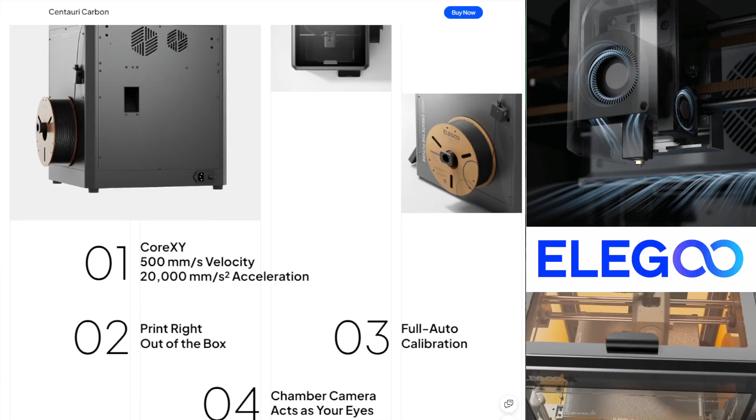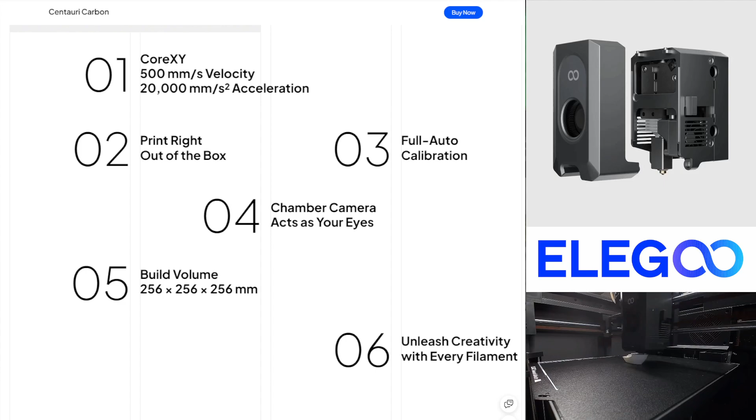Full auto calibration, has a camera built into it, so it can record its own videos and you can also monitor it, I believe. The build volume is the same as the Bambu at 256 by 256 by 256, so not too small, but not too large, but it'll do.

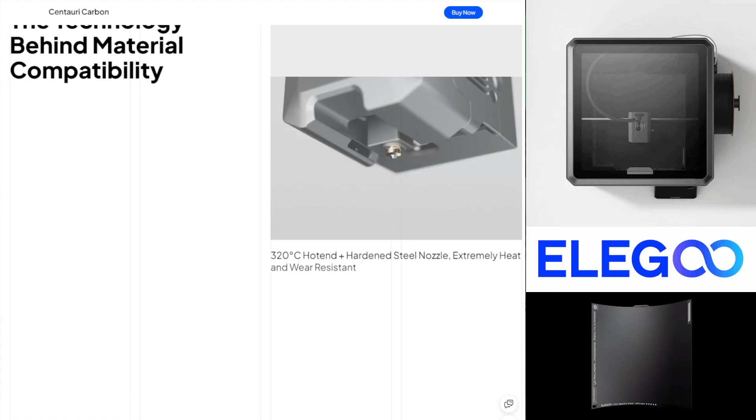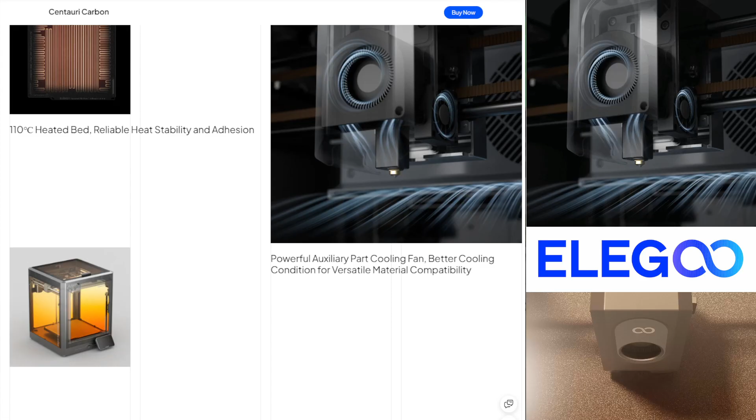You can see it's a little building there. Should be able to work with pretty much every material, 320 degree hot end. Comes with a hardened steel nozzle, which will work well for the materials. 110 degree heated bed, looks like nice even heating.

Cooling fans, the enclosed case, up to 60 degrees Celsius in the chamber, so you can print some of those more difficult materials like ASA, ABS that require a little more temperature control. Says printing right out of the box. Auto leveling, auto Z offset, auto vibration calibration, and auto pressure advance calibration.

We'll get into all of that with the camera, real-time monitoring, and recording videos with time-lapse. This is interesting to me, this even more carefree. So it has auto filament unloading, which most do, but this one looks like it cuts it because it runs through a feeding tube versus like a direct drive. I'm curious to see how well that works for things like TPU, which can have a little trouble feeding through. Has a fan self-check, self-automatic belt tensioner, the classic filament detector, built for speed.

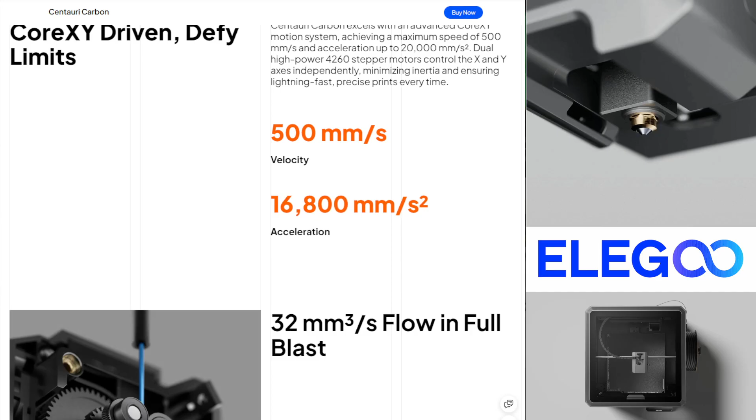I'm really excited to check this thing out, and I was lucky enough to get one of the first batches they had in the US. Other people are going to be waiting until like March, May, even June to get theirs. So yeah, that's the printer in a nutshell.

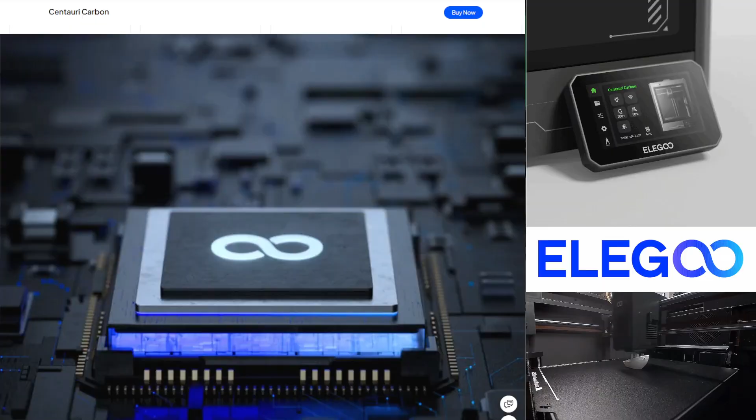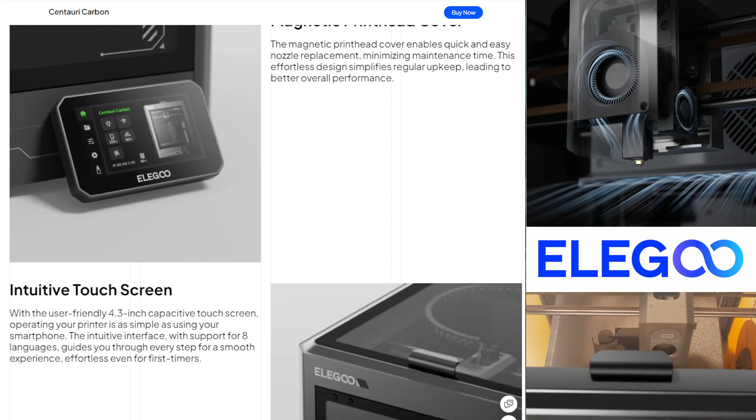Flexible plate, ultra user friendly, OTA upgrades, 8 gig ROM, dual band Wi-Fi, LAN enabled, filament on the side. It gives you a file, I think, for a filament waste bin, which is important if they do have the AMS. Little nozzle bed wiper built in, magnetic little front cover, so hopefully it's easier access. A touch screen, 4.3 inch touch screen, transparent glass doors, filters.

I mean, it looks like a high quality printer. Oh, and the price—it's freaking $299 for this thing. That's ridiculous for what this printer is.

So let's go ahead and get into the unboxing of it, because that's what I'm excited about. Right here, the Centauri Carbon. Woo! Big old box. Let's open it up and see what we got.

Just in case, they recommend keeping the box and packaging for 30 days in case you need to return or exchange. How nice. Alright, so make sure we can see everything. Foam on top. Whoa, that little pretty one. Oh, that's glass—must be the glass from the top. So that's that right here. Foam.

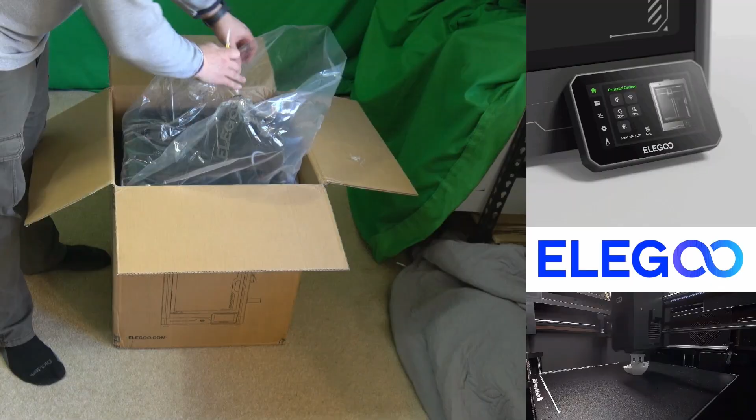So, as you may or may not know with my channel, I've been running the 3D Print Shop since 2021. Mostly making Quest and VR accessories, but also taking custom orders, printed game board pieces, and all different things. So I'm excited to use this for that particularly, and whatever else I have dreamed up.

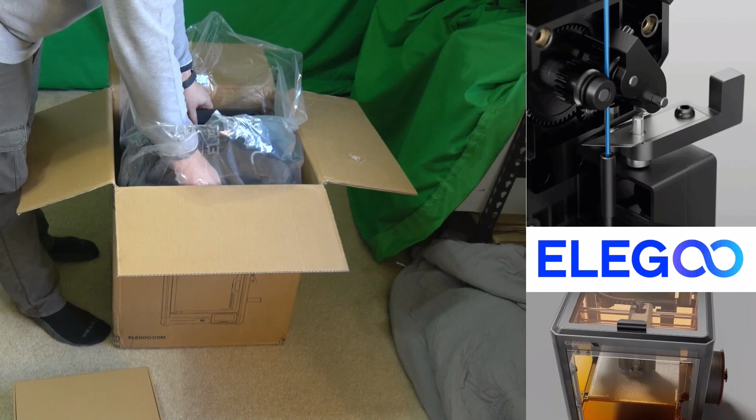Another piece of foam here, another foam in the box there. Oh, look at you. That down. Ready to come out again. Another little foam. Alright, I think we gotta get it out.

More foam. Well, we definitely have packaged this thing well. More foam. I can't guess. More foam. One more. There we go.

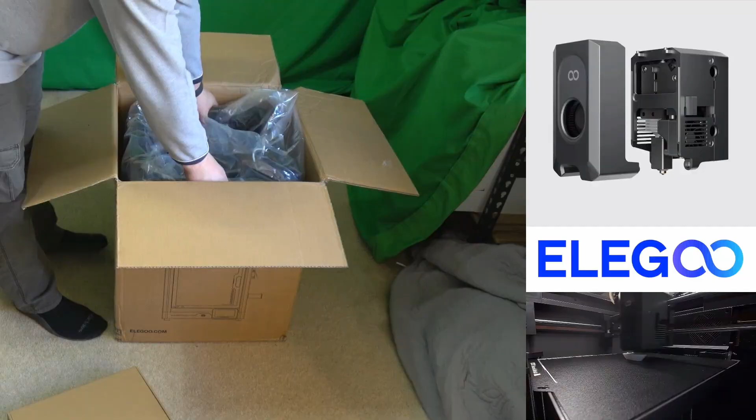Okay, that's it for the box. Put that aside, take this around. That's the front. Voila! We have ourselves a printer. There she goes, here I am.

Alright, so let's see, we've got some more plastic covers here. Oh, that's the cable. I love peeling plastic off a new item. Nice glass door. Curious if that contains some sound noise in there.

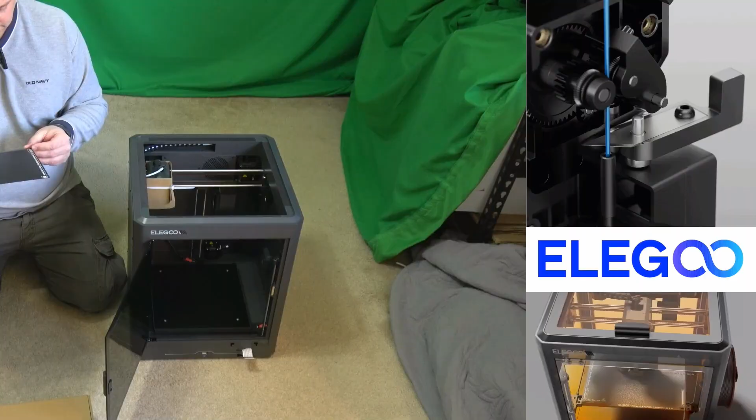On that side, the PLA specific plate on fine texture plate isn't ideal due to enhanced adhesion, which may cause difficulty. So this is the textured PEI side. Go up here, texture. And on the smooth side it says PLA specific plate adhesion, optimized for PLA printing on the smooth side. And the texture can work for PLA, TPU, ABS, PETG, carbon fiber, things that way. So A and B side are different.

And I'm sure you can get other plates. You could probably even use the bottom plates if you want something specific that way, because it's the same size. And with the auto Z height adjustment, it should adjust. But I think there are also memory settings, so you can set it if it's a thicker plate to know what the settings are. So where do we begin?

We got one little zip tie in here, and get some snippers for that. Snip. Okay. Release the Kraken.

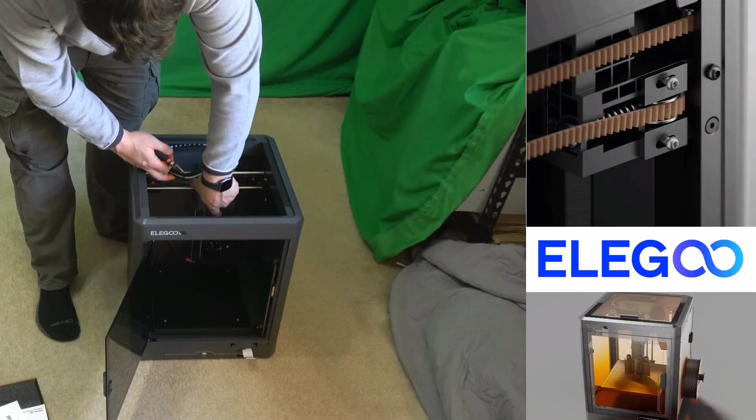Alright, it's got a little chain piece here, like the plastic kind of chain to protect the tube. Oh, it is definitely magnetic front. So yeah, I want you to see that. I'll bring it up on the table here once we're in just a minute. We'll set it up on the table. But let me finish unpacking everything, and then we'll get this going.

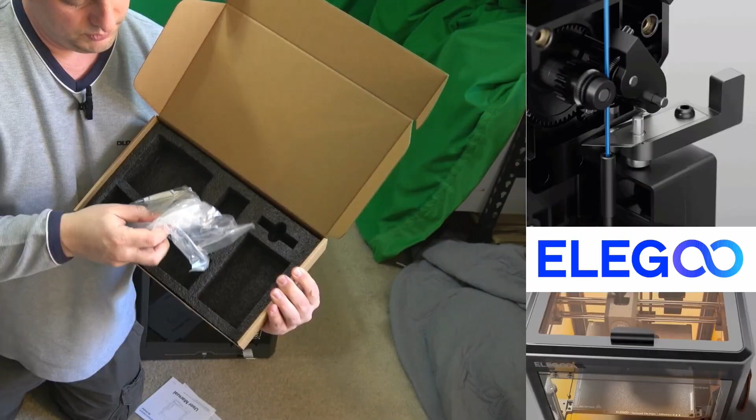So in the box we've got the power cable, we've got the screen, filament spool for the outside edge here, scraper blade, glue stick, tiny little bit of filament maybe, looks like a thumb drive, the cleaner, and some different things that way. And that's it for that box.

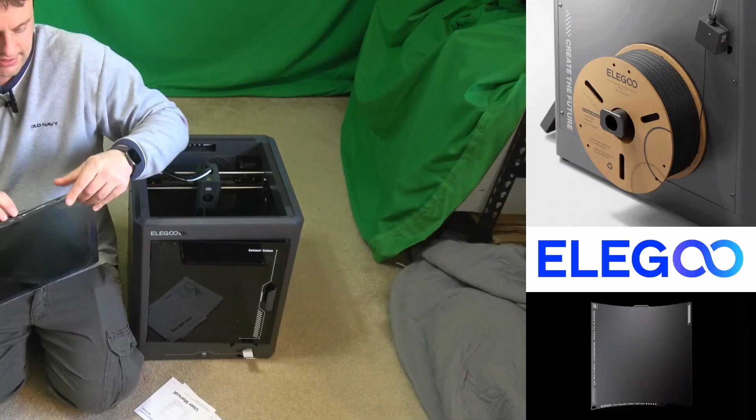There we go. And then this is the top glass plate, so it's got a front glass and a top glass. And this just sits on top. When printing low temperature filaments such as PLA and flexible filaments, please remove the top cover. So it suggests removing this top cover when you're printing PLA, when you don't need to keep the chamber warm. That's why it comes off easily.

Alright, and we got our user manual here, user guide. Took out all the stuff. Looks like we need to unlock the heated bed. That's important to know. Install the touchscreen, do a device self-check, and then get to the first printing, which we'll get to in a minute.

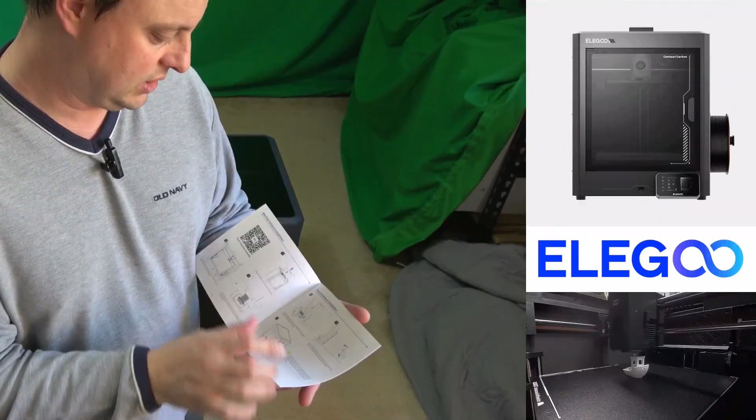You're going to get a user manual. Inside here, printer specifications, build volume, speed, software specifications, and there should be, the Elegoo software has all the different profiles for different material use, but basically setup and operation. So we'll get into all of that. I'm going to get this set up, get it on a table, and we'll be right back.

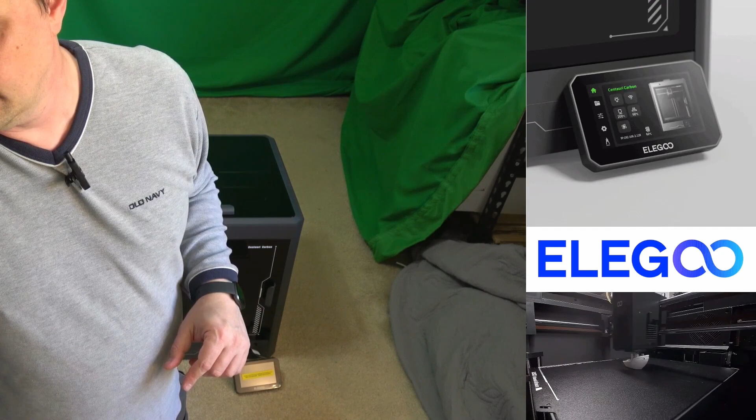Okay, we got it set up, it's on the table, and plugged into power. I've got a white spool over here because it's all black in there, so white will hopefully show up a little better. So I powered it on, go English. Yep, it tells me to remove - there were 3 bolts here locking the build plate down. So those are removed. Ensure the chamber is free from foreign objects. Hit confirm, and now it's going to do a self-check process.

So we'll see how that goes. Not too loud.

One thing that would be nice is if there were like a little latch or a lock or something that you could put the top glass panel on the side so you don't lose it. It'd be perfect on this side with just a little bracket that it locks into, so then it's always available when you need it, since it's not like a flip-up top to it.

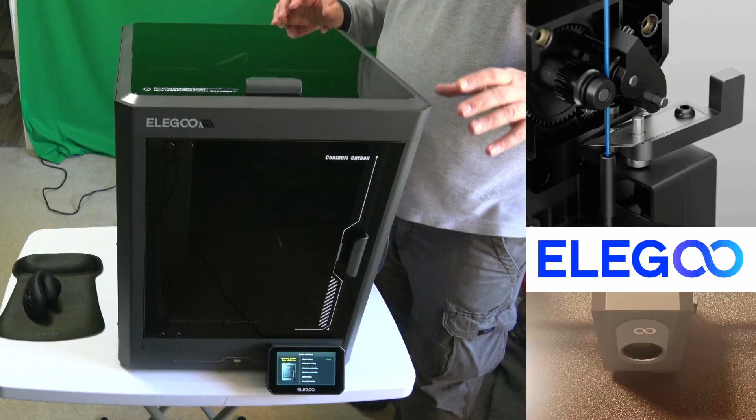But if I close these doors, that's pretty quiet. It gets really quiet actually once you close the doors there. You don't hear that fan nearly as much. Just let this continue heating up here.

Alright, we finally finished our self-check. Yay!

Confirm. Okay, so now let's see. We've got a light, which I've heard the LED is not quite as bright as you may want it to be. Digital graphic here - nozzle temp, Wi-Fi.

So I will need to get this connected up to the internet because it wants to do a firmware update before we actually print. We're going to just go through the settings, then I'll pause, update the firmware, and then we'll get into an actual print.

So you've got fan controls here - auxiliary fan, silent, normal, ludicrous. Ludicrous on the auxiliary fan - that's ludicrous. Normal, silent. Ludicrous speed! Alright, Spaceballs.

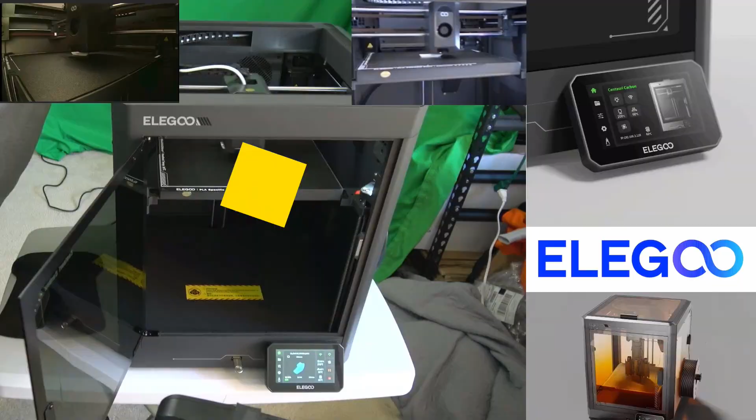And voila, our 15-minute benchy is complete. One other thing I meant to mention, the tray goes in really cool because there are grooves on the back here, so the build plate just sits in perfectly every time. There's no fiddling, like am I aligned, where am I? But let's see if it will release. Yep, just releases.

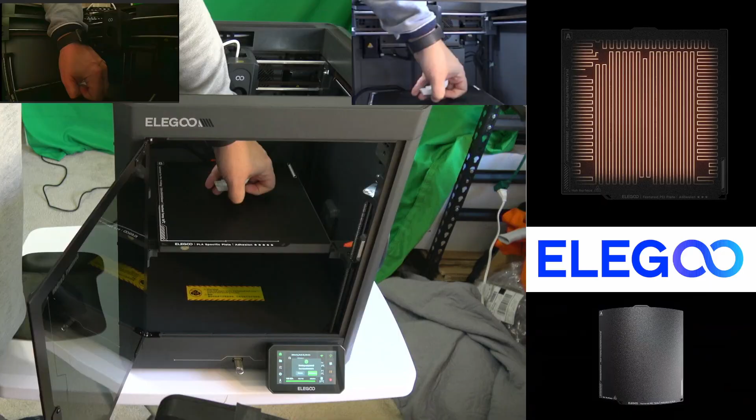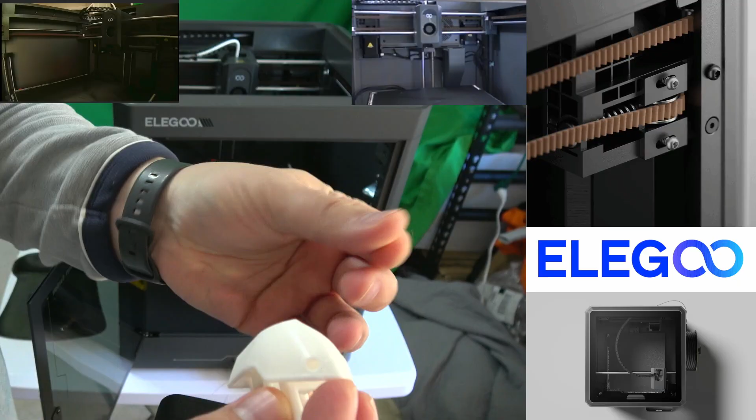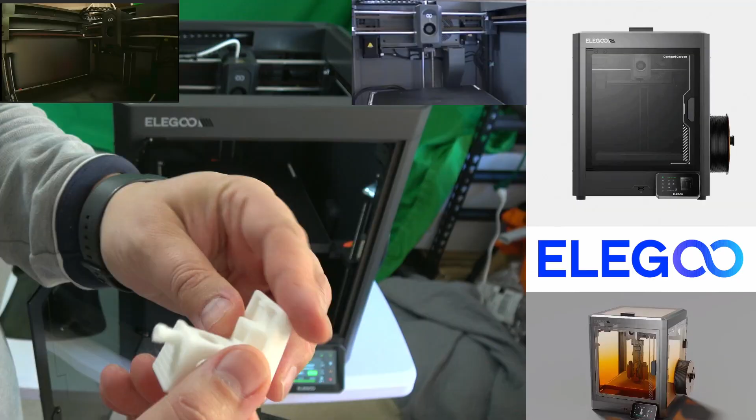Now there is the stringing on the inside, but a little fire will clear that right up. So see there, we just spit a little fire into her.

Oh no, we dropped our benchy! Come back, benchy, don't leave us! All alone! Alright, back to our benchy here.

So yeah, quick little flame cleanup there, and she's good to go. There we go, you can just brush off the little bits. That's a nice benchy.

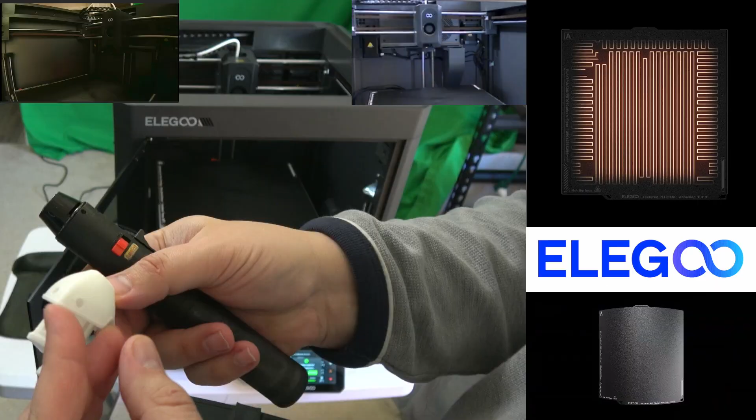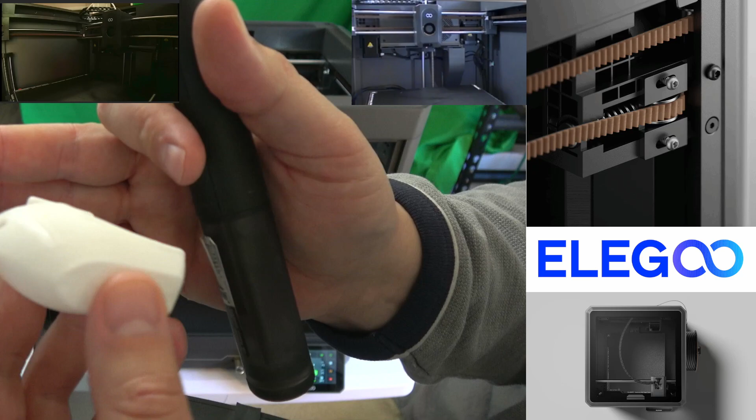Alright benchy, make sure I'm done. So we'll see if we can get this to be smooth. Here, I'll turn a little more light on. There we go, benchy examination. I mean, I'm impressed, that was nice.

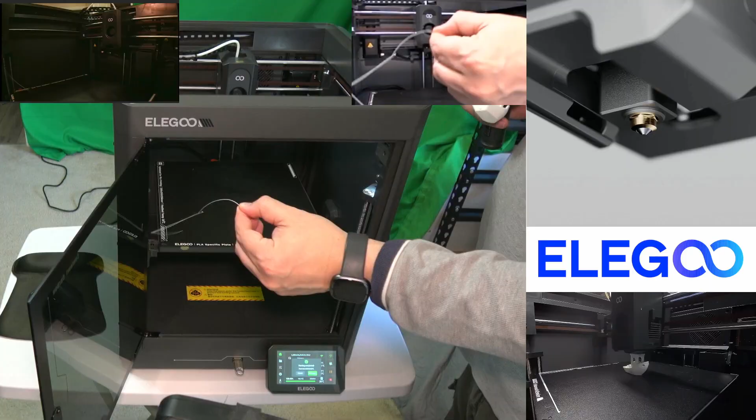Benchies can take like an hour or two. Now it does, on the printer, you can see here, it pre kind of goes through. And I'm curious if this is going to try to level every single time it wants to do something, because I don't want it to level every time, so I'll have to go in and check the settings for that.

I am now going to load up some black filament. I'm going to print out the tray, the back tray, hopefully if I can find that file in here, and we'll go from there. So I'm going to pause, and I will record that one with the time lapse also.

So give me a second while I get everything changed and loaded for that. So we should go here, we're going to change out the filament. Extruder, unload, let's see what happens when we unload. So unload, it's going to cut the filament.

Don't know why it needs to level the bed for this, but whatevs. A lot of bed leveling going on with this here, buddy.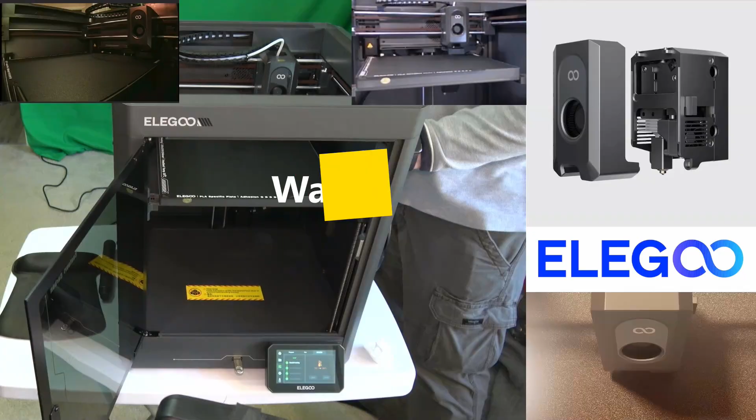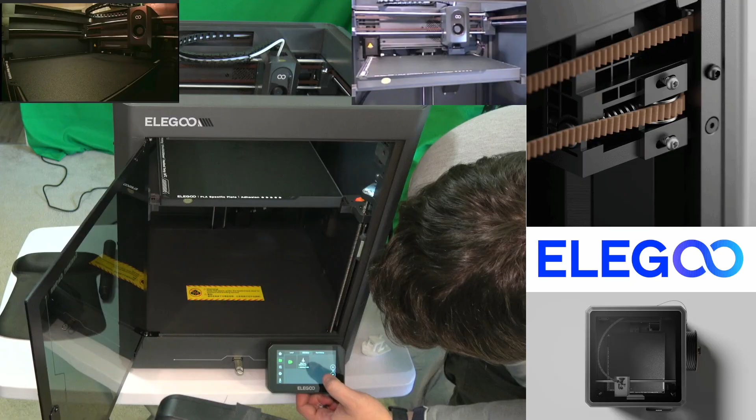Little filament, okay, completed. So now we're going to go back here and go to USB, models, 3D Benchy, CC Mini. No, I don't want the box. Back. Eiffel Tower, no, there it is. Mini poop bucket. Time lapse is on.

Ah, there we go, I can turn off level here. And now we can print. So this is going to take 2 hours to print.

I don't think I have enough filament loaded, so we'll test the filament feature also. So this is saying it's going to take 2 hours. I turned off leveling, so I'm not going to time lapse record this one, but I will come back and show you the results once it's done.

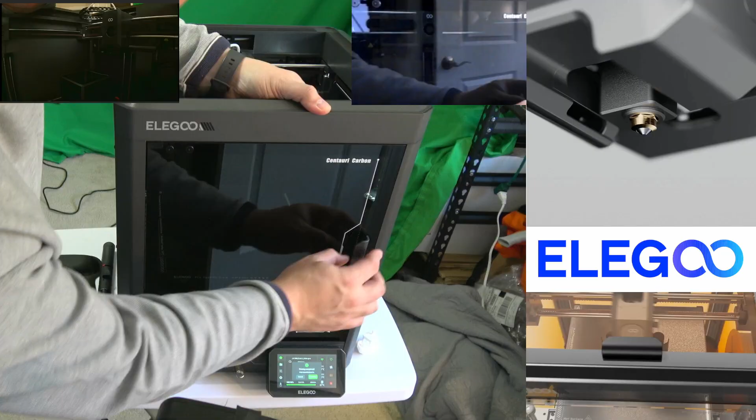Okay, the print has finished, it took 1 hour and 58 minutes. And again, this was the disposal tray, the poop tray. So I'm going to lift that off. And this was printed with PLA, high-speed PLA from Freemover, and I haven't had a lot of success with it. It's printed some weird edges. So I'm curious to see how this came out.

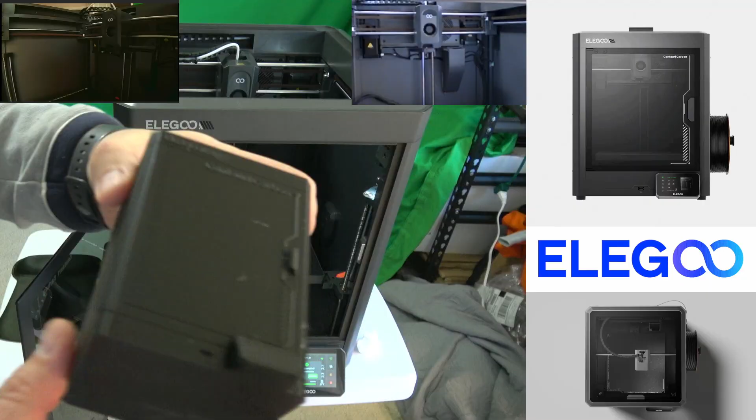And here it is. Let's see if we can get some light on this puppy so you can see it better. There we go, alright.

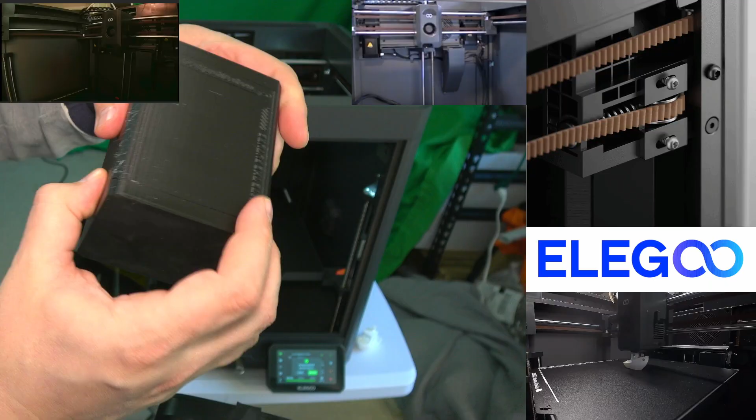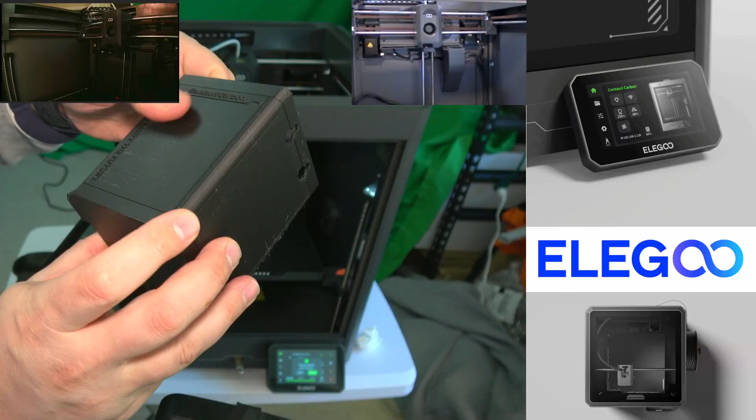So it actually printed very smoothly. I'm actually, with the high speed, it had weaker layer strength, but the Elegoo did a remarkable job. You can see the bottom there, very smooth, nice, clean. I think a little touch up of fire on this puppy, we'll just clean her up here. There we go, text came out nice. Centauri Carbon there.

A little cleanup on the inside, and I think that's going to work. It's a cute little lock. Yeah, it made its own little mini carbon copy. So I'll put that on the back of the device.

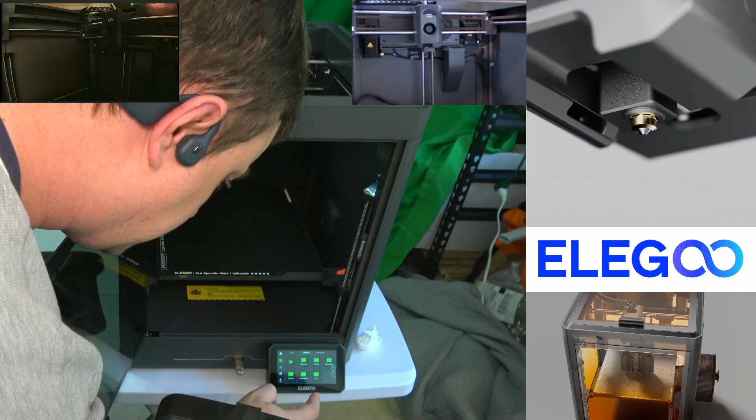When I was looking around in the settings, there's actually another thing I want to print. If we go to the folder and back to the USB drive model, there's a CC Mini, and it's not on here, but I found on the website there's a CC latch. Looks like they made a model to hold the door. So I'm going to download that and give it a shot printing it.

And I'm also going to show you the software, so give me just a second here. We're going to load in. It had a G-code file and an object file, so I want to see if I can import the G-code directly here. I'm going to copy the G-code. All right, so that's there. I should be able to find this now on the device or just tell it to print. I will need to load some new filament though in order to do that. But let's also go look at the app software.

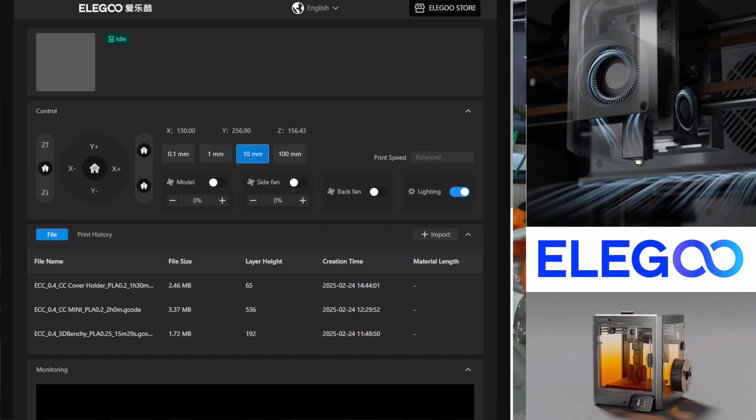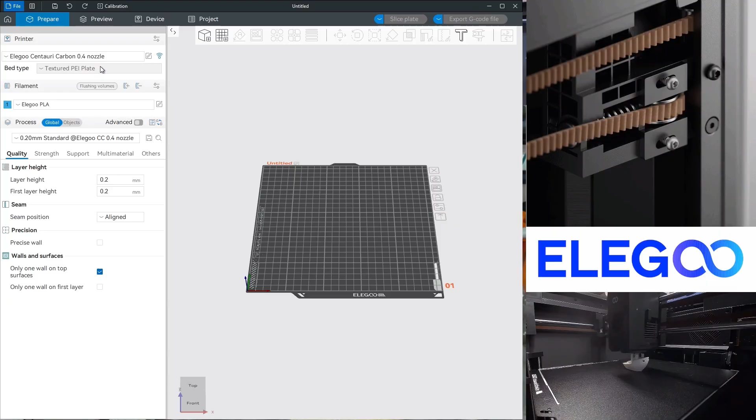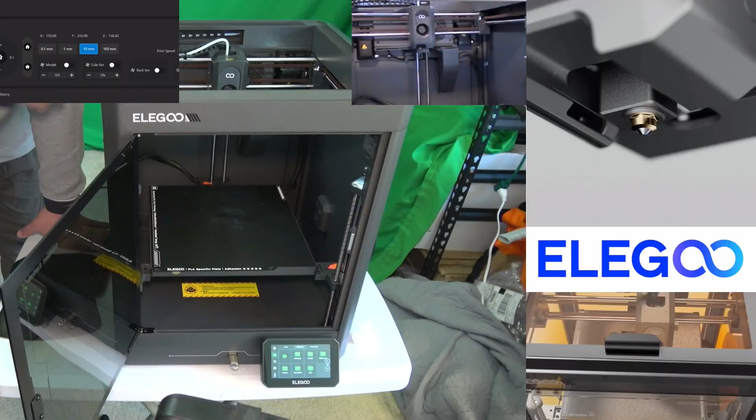So this is the Elegoo slicer. You can also use Cura. Profiles, to open a project. File, import an object, and then downloads - I want to import the cover holder. So there's the cover holder. Like I said, it would have been nice if this had cover holders on the side, but sure enough, they have a file for it. You can go grab it and print it just like the waste bucket. What that does is those two handles go on the side of the printer. There are little bolts here, and once they're on, you can slide the door along the side. So this is going to be perfect, I hope.

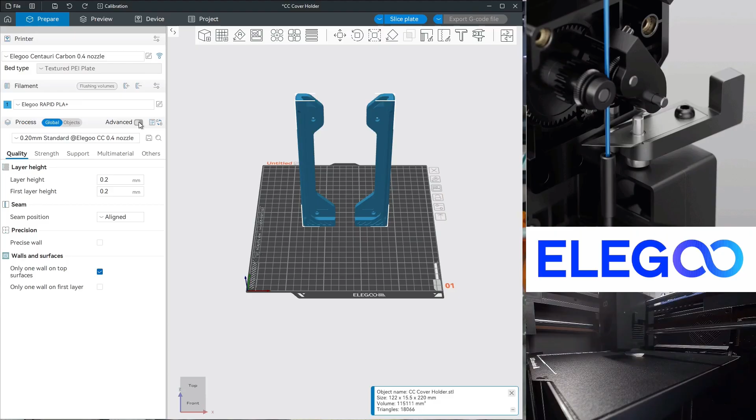So I am going to slice these up just out of curiosity. With the default settings, Elegoo PLA, Rapid PLA Plus, Elegoo brand, 0.2. I'm curious on the speed. I'll need to go check the different settings, but I'm just curious what print speed it's printing at. I'm used to Cura, but let's click on Advanced. There we go, now we can see speed. With the Rapid PLA Plus option, first layer is 50, layer infill 105, outer wall 160, inner wall 200, top surface up to 250 on the print speed. That's pretty good - travel speed at 500, acceleration and everything that way.

I'm curious, if I choose just normal PLA Plus, does it change these speed settings? And it doesn't - speed settings look to be about the same. Now what if we do... okay, so standard, strength, draft - they have different system presets there too.

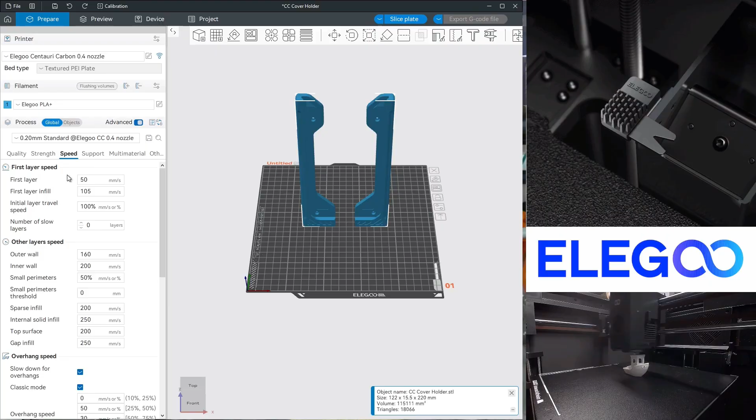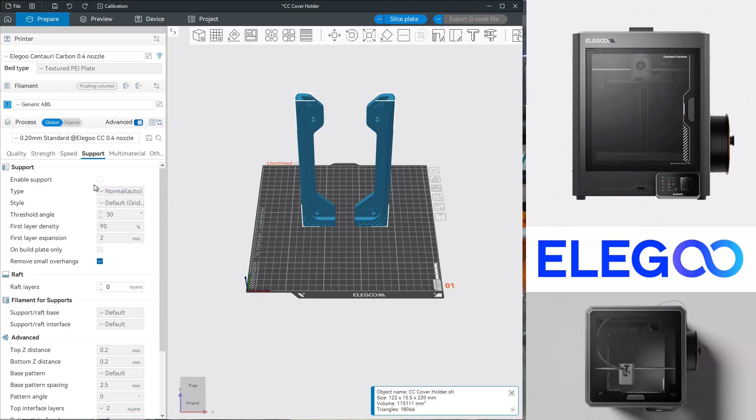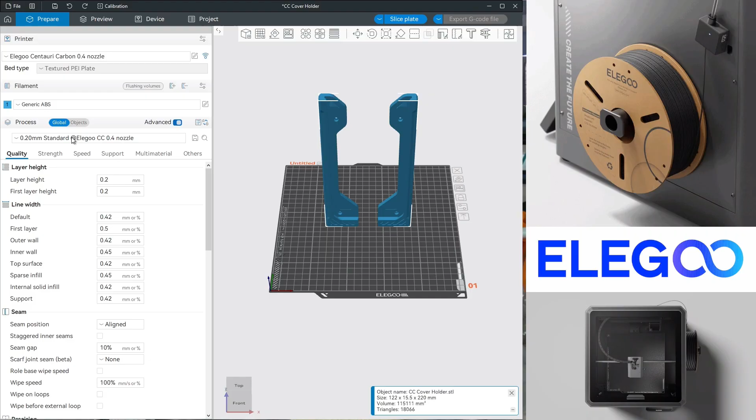Let's see what happens if we select ABS. With ABS, all those settings stay the same, but let's see about the temperature. Where's temperature? Different settings here - gaps, ironing, wall, strength. So it would definitely take a little getting used to and adjustment here. Speed, support, multi-material, ooze prevention, flush options, interlocking, skirt, brim, special mode, G-code. I don't see temperature in the settings here. Oh, that's it there - so I'm not sure where temperature is stored. Bed type, so Carbon 0.4 nozzle, flushing - I've got it set to advance, and then you can do extra draft, so that probably all changes the speeds and fine details. Generic - doesn't change much in the way of print settings here: overhang, speed, acceleration, jerk, advance. I don't know where temperature is being controlled, so I'd have to dive into that a little better.

But you can preview the print, check your printer connection, send it to the model - so that's the software. I might just end up going with Cura and replicating the settings out of the Elegoo software into my own profiles. But I'm going to get these things printing.

My general thoughts on the device: it's a great device for $299. You can't go wrong, I don't think you can go wrong. I mean, enclosed, it prints fast, it prints clean. Yeah, I'm very, very, very happy and very surprised at the price point for it. So I would say go get it.